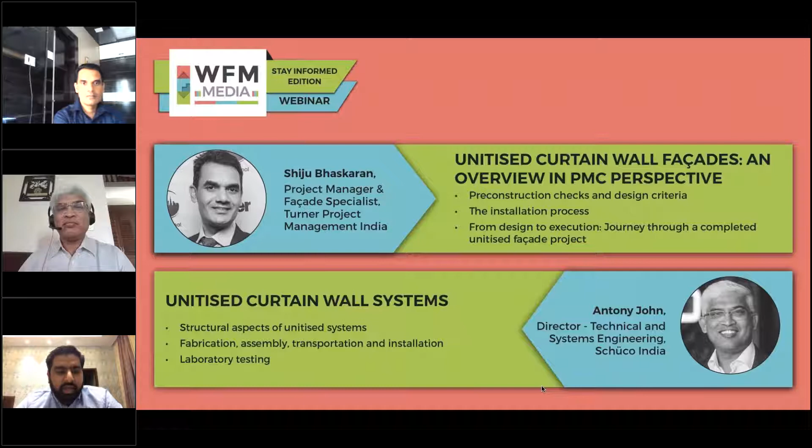To just give an overview of what's being discussed today, again, the topic is on unitized curtain wall. Shiju Bhaskaran will be giving an overview from a project management perspective, pre-construction checks, the installation process, design to execution with a case study. Antony John from Schüco India will be talking on unitized curtain wall systems, structural aspects, fabrication, assembly, transportation, logistics, and laboratory testing of unitized curtain walls.

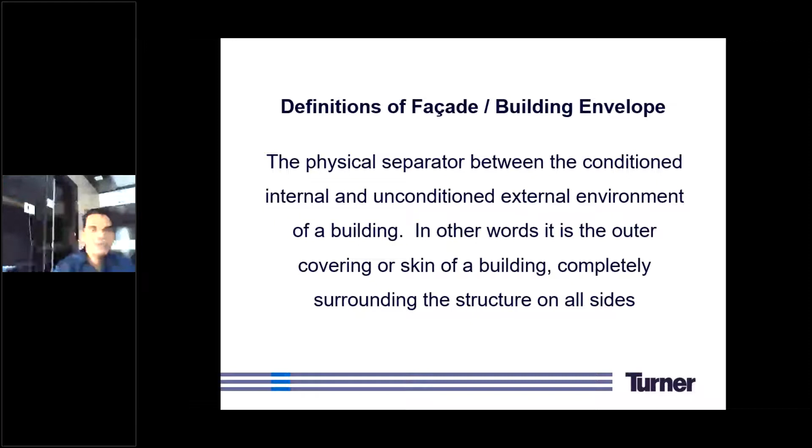parameters? So before talking about design parameters, the physical separation between the conditioned internal and unconditioned external environment of a building, that is the general definition of the facade. So a facade designer should consider all these parameters which you can see over here. These are the enemies of the facade, like air pressure, sound, daylight, snow, heat flow, humidity, fire, and contamination. So the designer should take care of all these.

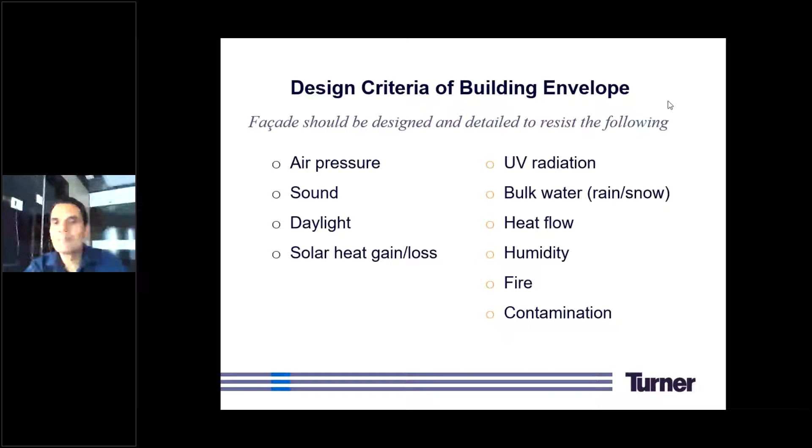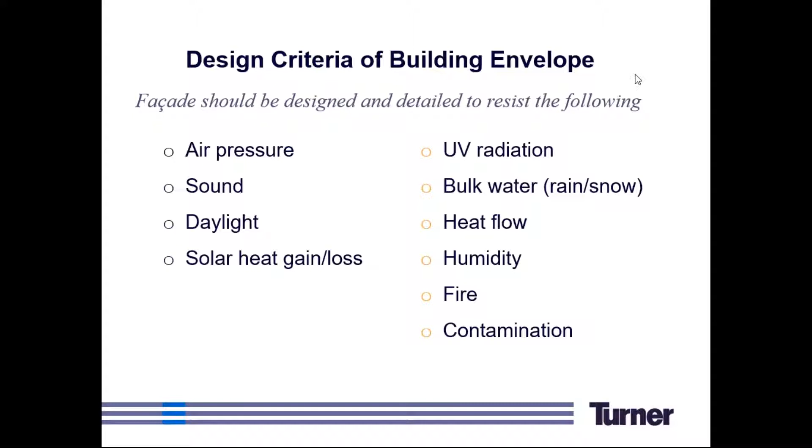Shiju, what I suggest is if you can switch off your camera, we'll get better bandwidth and a full screen, because we're having some issue with your audio. Just switch off your camera. You can press the button over there, the button is on the screen. Yeah, you mean switch off the camera? Yeah, just switch off the camera. Right. This is perfect. Thanks. Right, you can go ahead.

Okay, so the designer uses different... So the facade is designed for all the loads, as you know, the dead load, live load, the equipment load like facade cleaning equipment, gravity loads like people and snow, and the lateral loads like wind load, lateral seismic force, and thermal forces like expansion and contraction. So these are the major items which will come. Then comes the weather control layer.

1 minute, let me just close the door. 1 minute. My wife also registered for this webinar, and she is listening from the other room. So I'm a bit nervous.

You understand, right? So the primary purpose of the weather control layer is to manage the rain. So flashing, drip edges, weep holes, or any horizontal surface should have something like 2 degrees of slope. Those details should be considered in the weather control layer. Then comes the air control layer. The primary purpose is to control the airflow. There should not be any airflow into the building from outside. We use membrane, sealant, gaskets to control the air.

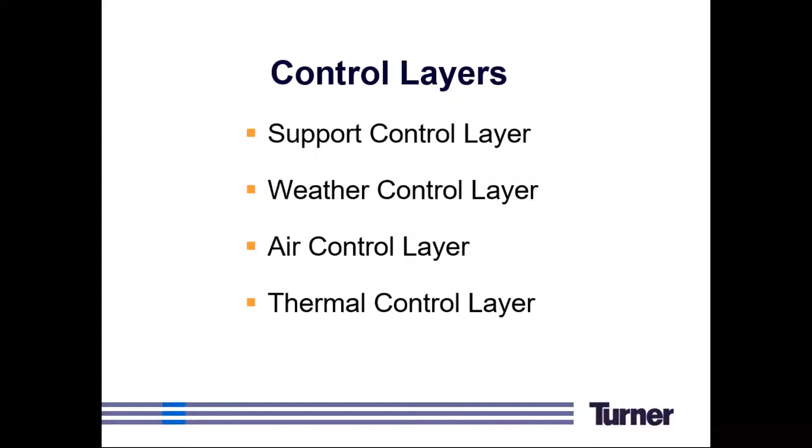So once the designer completes his design, the responsibility shifts to the site team. Site teams like us should realize the dream of the designer and the builder by ensuring the safety, quality, and cost parameters. Before starting the execution, we should do many pre-construction exercises. From a PMC perspective, I will talk about the major pre-construction studies which we conduct. One is the cost confirmation. We all know budget should be considered during the design stage itself. However, a serious budget comes only after we get the financial proposal from the vendors.

Then people will talk about value engineering. In one of my projects, the internal metal panel, aluminum, was changed to GA sheet. Something similar like that. So when you do value engineering options, make sure that the performance is not impacted. You can vary the specification without impacting much the performance of the overall facade.

Then the shop drawings. A detailed shop drawing should be prepared about the system, defining the grade, the extrusion material, and the specification of all these materials, including the powder coating, and at the end we should get approval from the consultant.

Visual and performance mockup is very important. A full scale mockup representing the actual product. When I say full scale, it can be 2-3 panels in the same 1:1 scale size, prepared for visual inspection and performance. The visual mockup can be done on site, and the performance mockup can be done either in the laboratory or sometimes in the plant if the vendor has the facility to do it. Tests to be passed are water penetration, strength, air infiltration, and seismic performance, and acoustic performance also can be tested.

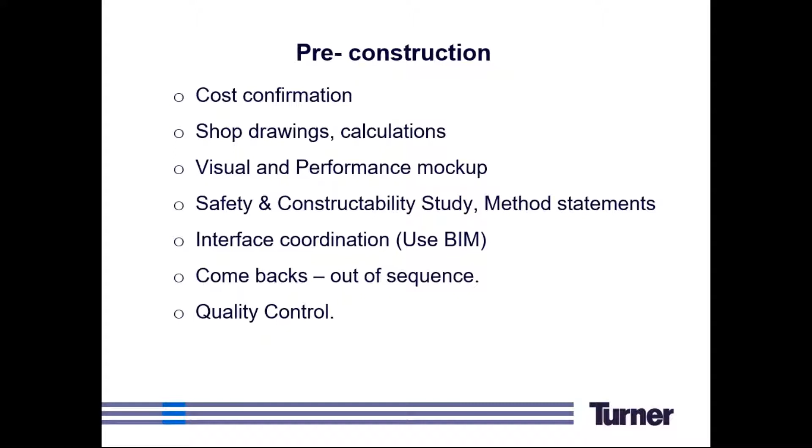Another thing is quality control. A quality checklist can be prepared. Many of the PMCs already have it. Many facade contractors also will have it. The quality control manual, what tests you will be doing after completion of the work during the closeout stage, and the inspection schedule, all those things can be discussed in quality control.

So now let me take you to the field. I hope that will be more interesting. This is the project which I mentioned previously. Here, this is a facade. I'm just showing one floor. Let me just show you how you define a unit, like a unitized panel. One of the panels is what you can see over here, another panel like that. So you divide this entire facade into different sections, different elements.

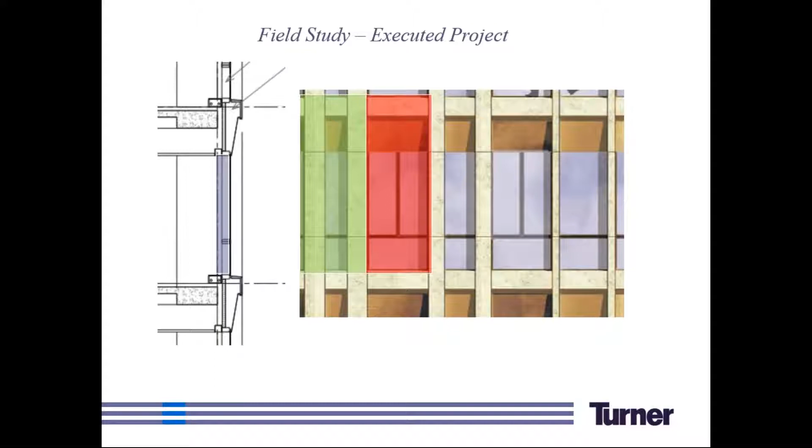So this is one unitized curtain wall element that will be fabricated in the factory, and then we come here and install it. So you can see here, if you can see the cursor here, this is a natural stone. With natural stone, the width is different in different panels. In that case, those all become unique panels. But it can be repeated. It will come like a modular panel, and it can be repeated in the upper levels.

So normally a unitized panel will have, you can see here, a spandrel on the top like this. So a spandrel with thermal insulation, and that can be used for fire separation also. If you have a nice stone wool kept on that spandrel, it will be helpful to stop fire spreading to the upper levels. So that's one option for this.

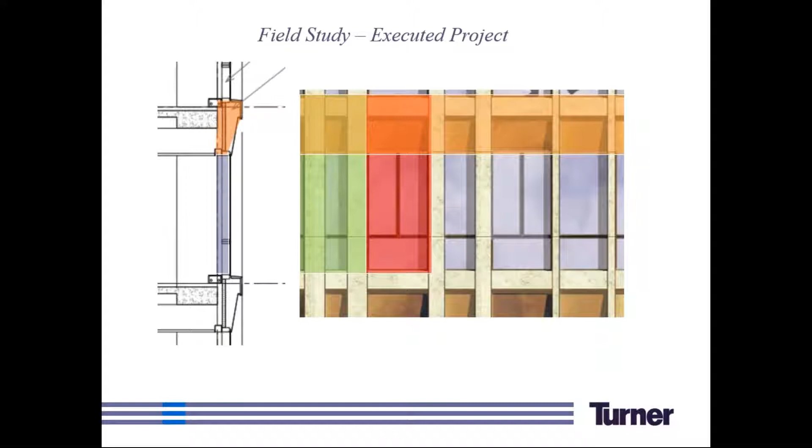And in most of the cases, in the front of the spandrel, you can see a stone element. In this particular project, we have aluminum. I'll go into detail in the coming slide. And secondly, we have the glazing. The glazing part can be a fixed glass or operable windows. I'll talk about the glass assembly in coming slides.

So this is an enlarged view of this spandrel part which I mentioned previously. Here you can see there is a stone cladding which will be fabricated in the factory with its back support, secondary support. Then you have an aluminum member here and its back support. Here we have used 3 mm aluminum with powder coating as specified in the drawings.

Then we have the stone wool inside, and you can see the connection between the facade and the slab edge. There is a gap. There we should use a flashing that will stop any kind of smoke spread into the next level. Smoke is more dangerous than fire, so that should be taken care of properly.

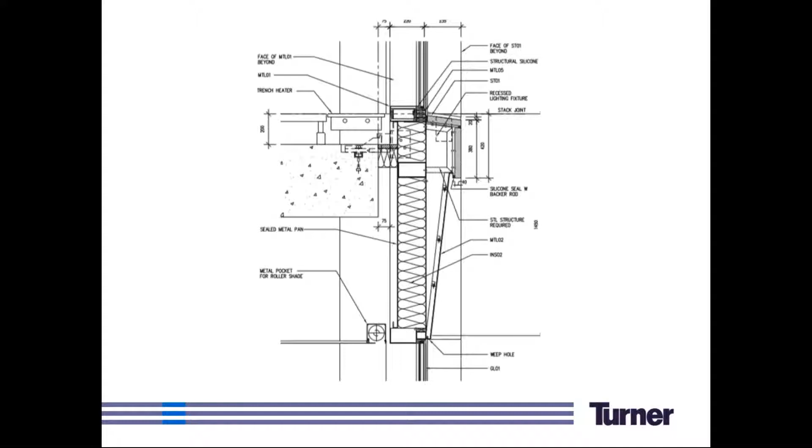Now let me take you to the next slide, a bit about the glass. This glass composition I have taken from one of our projects in the Far East, because the other project which I mentioned is in Astana, Kazakhstan. There the temperature difference between internal and external environment is very high. External temperature will go to minus 35 degrees. The Far East is more like India, almost the same kind of humidity and temperature considerations. So I have taken something from there.

So here you can see in the external element there are 2 glasses with a sandwiched PVB laminate. We have used 6 mm glass and another 6 mm glass. In between we have 1.5 to 2 mm PVB laminate. It's a clear laminate. If you need some different color, that's also possible. Then a 16 mm air gap, and inside 8 mm, again a high strength glass.

For the project in Astana which I mentioned, we needed better control, better insulation. So what we did there, we filled this air gap with argon gas. That will help a lot. And the internal glass element was 12 mm thick.

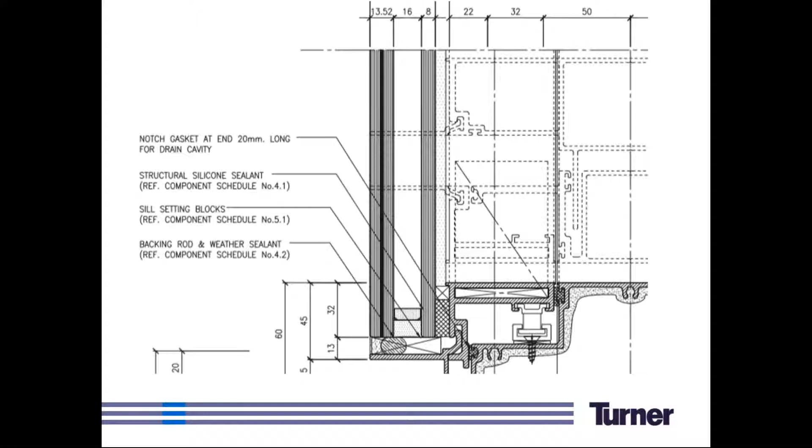Now let me take you to the field, about the installations. This is the first activity of a facade contractor. Here we have an interaction between a structural slab and the facade element. This is the first connection element. We will be installing this U channel. I don't want to use any trade names here. So that is the connecting element. All the load will be transferred from the facade to the structural slab edge using this U channel.

The U channel will be inserted into the reinforcement cage. There is a chance during the concrete pour and vibration that the U channel can move. That's a common problem we are seeing in the industry. So make sure you restrain it properly.

Nowadays these U channel suppliers are coming with some good options, like some end plate and welded mesh, and you can clamp this U channel to that. So that's an option. And you can see there is a T-bolt. That's another connection element which will come later. You can see there is a lock here. So this will be inserted into this U channel to connect the bracket. Normally this U channel will be almost 250 to 300 mm long, around 3 inches deep into the concrete.

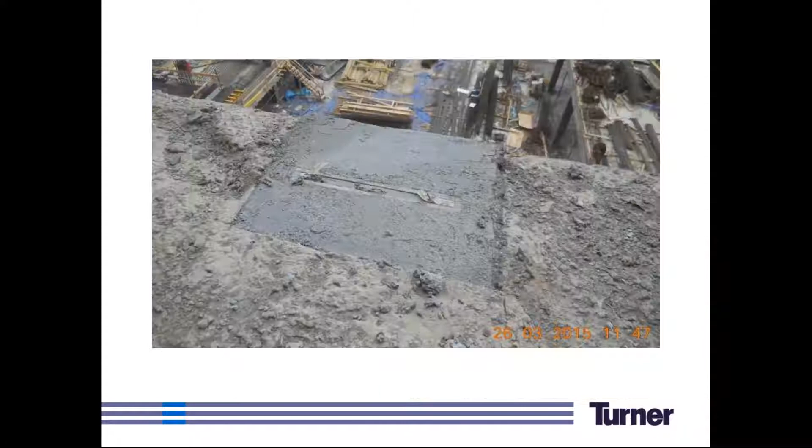Now here, this is the next activity. Once you install the U channel, it should be tested for its pull-out strength, shear strength, tensile strength, all those things. These vendors have equipment for doing that. You should do that after the concrete gets its strength. Anyway, you will get that strength because the facade activity will be done at a much later date.

Now the connection: you can see over here, this bracket is connected by using the T-bolt. Above the T-bolt, there should be a minimum of 1.5 to 2 pitch. Only then will it be strong. You should do the torque test for this. One important point I need to talk about, let me take you back to this T-bolt. On the top, you can see a notch. This shows the direction of the T-bolt.

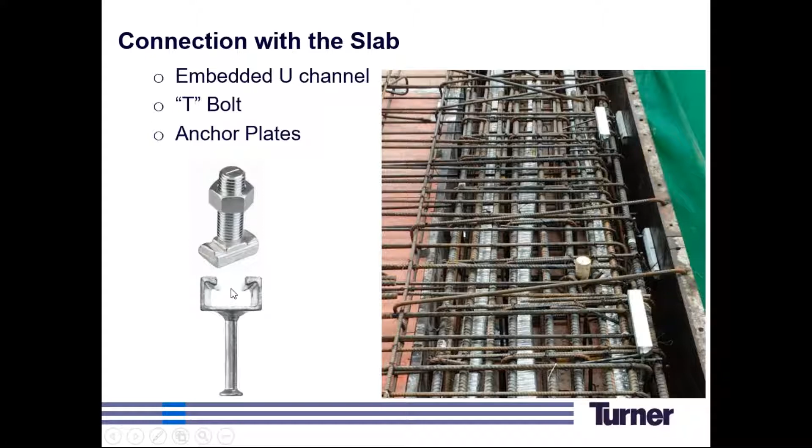Once you insert this T-bolt into this channel, it should be perpendicular to the longitudinal direction of the channel. Only then will it be locked; otherwise, it won't be. Once you install the bracket, you won't see the connection between the T-bolt and the U channel. That's why it is important to know the direction. On the top of this bolt, this notch will show the direction. In case you think it is not perpendicular to the longitudinal direction of this U channel, you should open the assembly and do it again.

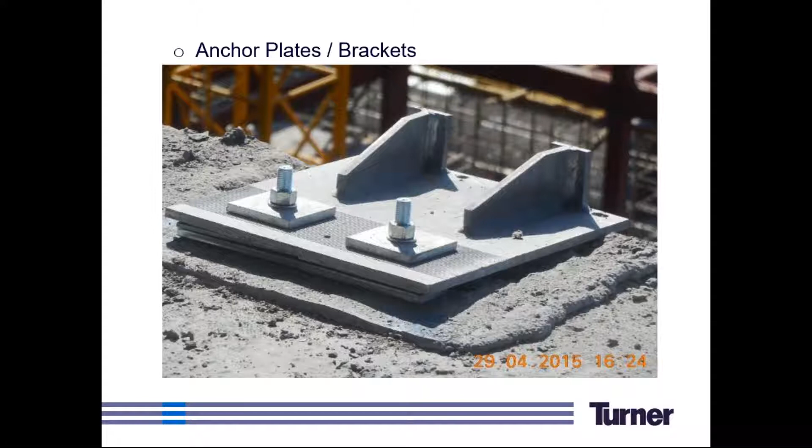Now about the fabrication, I won't be talking much about it because most of the system components are assembled in a plant or factory under controlled working conditions. Quality will be improved, schedule can be predicted, and rapid closure of the building without being affected by weather conditions is possible. So this is a very good system. That is the main beauty of this unitized panel.

The stick system is something like cast in situ concrete: you do everything on the site. A unitized panel you can consider like a prefabricated or precast element. But as a PMC, material release, fabrication and assembly, the time taken, conveyance, how you bring it to the site, where you will store it, all those items need to be studied well in advance.

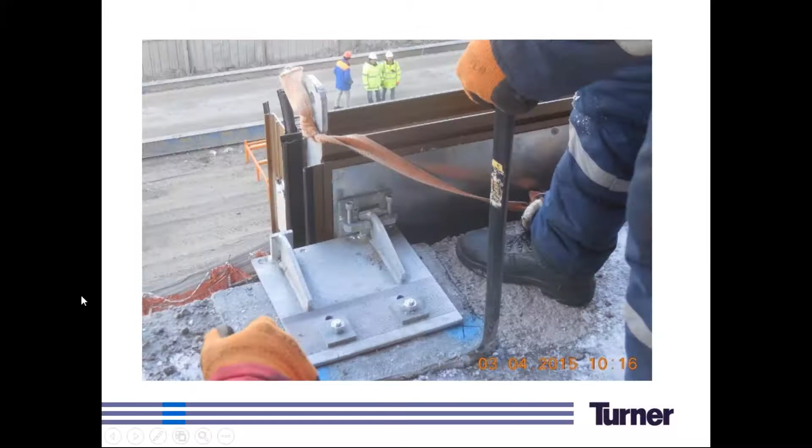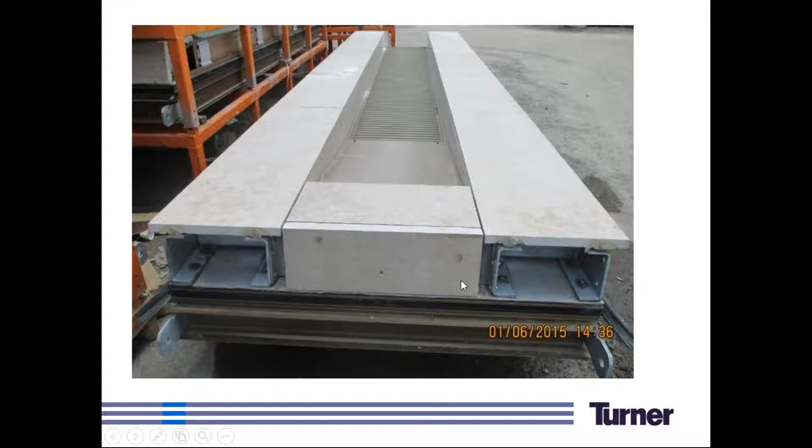So now let me take you to the installation. You can see here this panel is lifted using the crane, or you can use a winch also. In some cases a monorail can be fixed, or we can use BMUs. But normally BMUs come in at a very later date, so you should use the crane or winch.

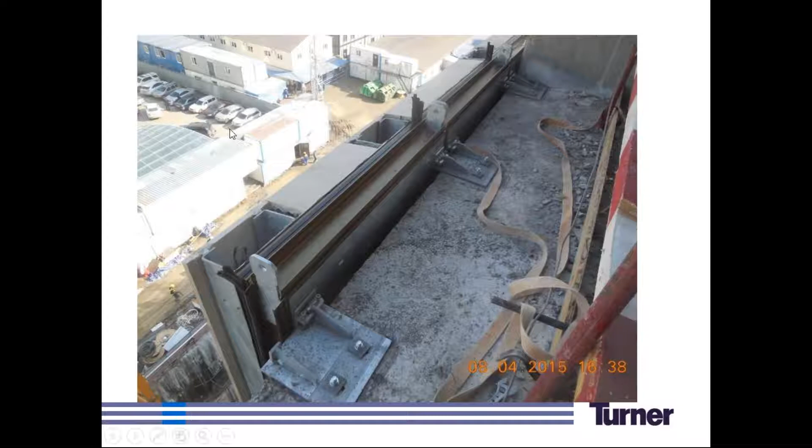So here the facade element is connected to our bracket properly, and only one panel is connected here to the bracket, and the other side another panel will also come so it locks properly. This photo shows the exact connection between the two panels, and the gaskets are all visible here. These are the lifting hooks, and you can see this gap, like I mentioned previously in the sketch of the span rail.

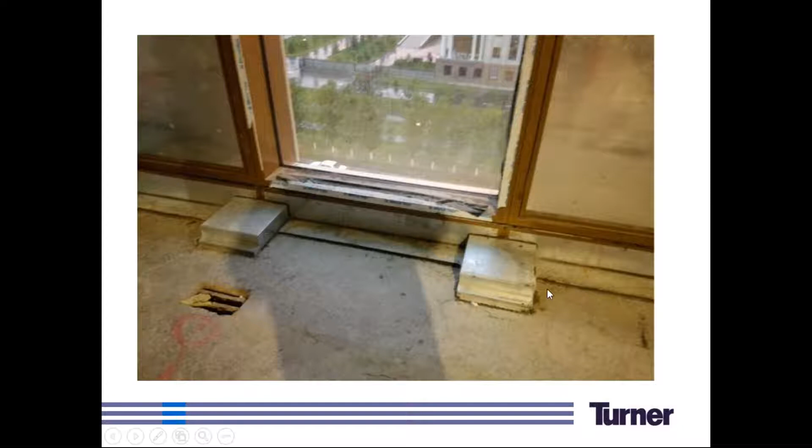Later you need to seal it using some flashing here. So now, this is a photo from inside. All this bracket assembly is covered so that debris will not get in, and this is the flashing. This should be sealed properly, there should not be any gap into it.

Now this is a facade protection for the glass. Normally the facade activity will follow the structural slab activity, so facade work will be starting even while the structural slab pouring is going on at the top. There are a lot of interior works which will follow, like MEP activities and interior partitions, and during that time there is a chance this glass can get damaged.

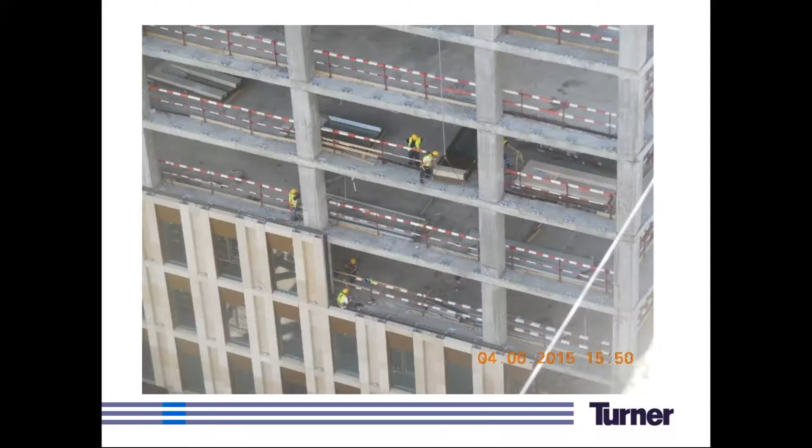Minor damage can be prevented by using this spray application. It forms a kind of membrane that you can peel out during the finishing stage, giving some protection to the glass, especially when we deal with different package contractors. Every package will think only about themselves, they won't think about others, so in that case it's very critical to protect the facade work by the facade contractor.

So here, this is showing the progress. The installation is not very labor-intensive work. You can see here one crew, one team bringing two guys on top, they take the panel down, and there is another person standing on the floor below at the installation bracket area, and another person on the lower floor. So it's like around 6 or 8 members maximum, and they can install these panels. It's very easy to install.

Now I am coming to the final slides, only a couple of slides left. Let's see, these are some points you should remember, from our experience.

You should coordinate with crane bracing in advance. You can see the crane bracing for a unitized facade. It is always good to take the crane bracing through the glass element, since glass can be installed at a later date. If it goes through the mullion, it will be a problem, unless you have some other jugaad in India, which I don't know. But normally this is done like this.

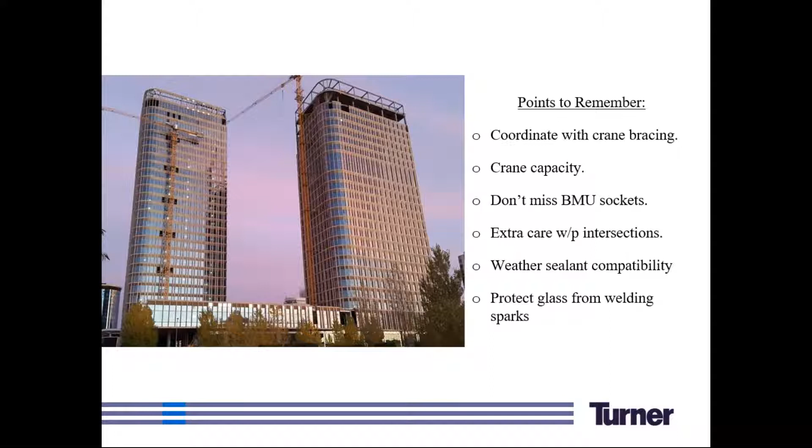That protection also should be taken. So this is the last slide. In closing out, you should do the necessary testing and arrange all the product warranties. Most products in a system are warranted, typically 10 years, so make sure you get it. Keep an attic stock, especially for major elements like stones, since later you won't be able to source it. Try to keep sufficient attic stock, compiled as-built information. So that's it, I hope you enjoyed this presentation.

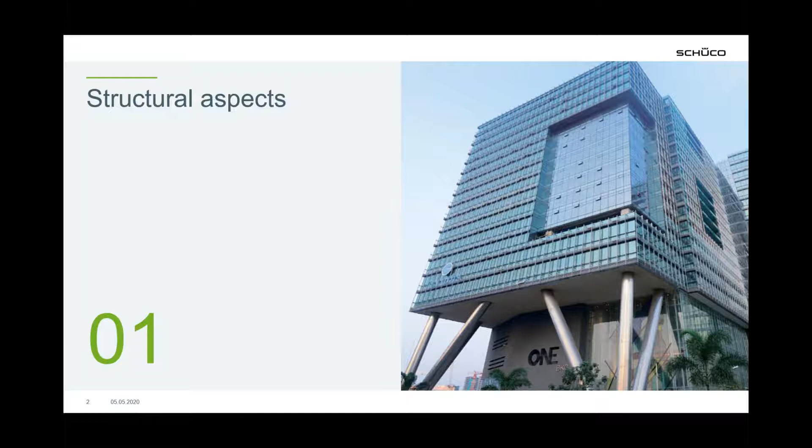What we are going to be talking about are three aspects. One is the structural aspects, then the fabrication, assembly, logistics, installation, and the last one is going to be the testing part of it. To understand any project, before you start deciding on what you're going to do, assuming that we've crossed the stage of tendering and gone through all these negotiations...

Then we start with the actual designing and constructing the facade that is suitable for the particular project. First and foremost, what you need to do is understand your specifications. So I would like to put it up in a simple format that condenses the most important critical items that need to be considered from a structural perspective, related to the tender specifications.

One of them is your wind load. What is the applicable wind load for your project? This is defined by the facade consultant, and there are different criteria - either you calculate it using Indian standard IS 875 part 3, or use a wind tunnel test report, depending on where your building is located and what shape it is. For this particular project, the specification was a wind load of 1.8 kPa.

The second aspect is understanding what modules are coming into the project. The most typical project module - we had a few different modules, but the most common one was 1.5 meters center to center. Each unit, which Shiju showed earlier, we had two different units in the previous project. Here, most of the units were 1.5 meters center to center, with a floor-to-floor height of 4.2 meters.

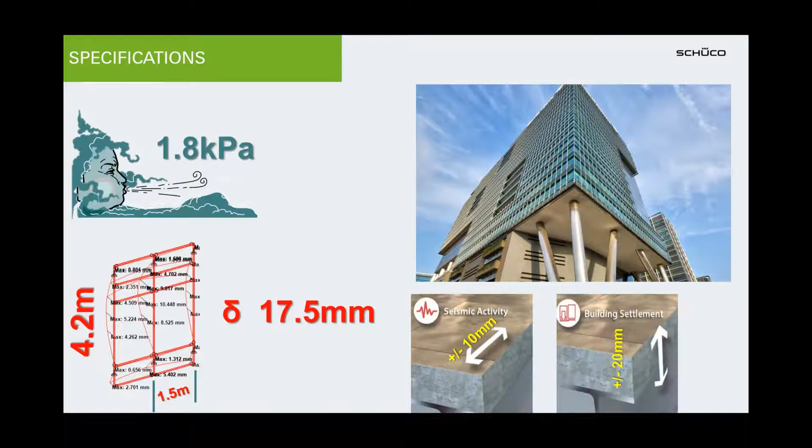The second thing you need to take into consideration is what kind of movements you're going to have - if there's seismic movement or any activity happening, what kind of movements are anticipated. The specifications mention plus minus 10 millimeters allowed in both directions. The other part is building settlement, movement due to thermal expansion, long-term creep, column shortening - all put together, the vertical movement was accommodated through the system, which is the stack joint.

You're expected to accommodate a building movement of plus minus 20 millimeters. This is pretty big. So when you do plus minus 20 millimeters, the stack joint gasket needs to have proper support. Otherwise, it will fall over and you will not be able to achieve the proper requirement.

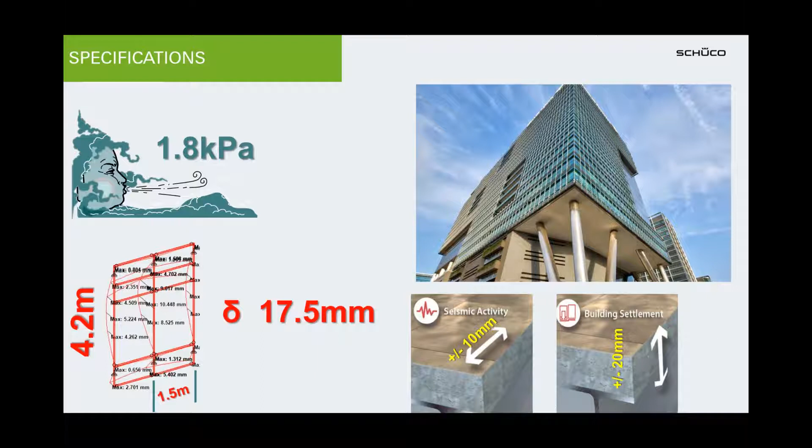Last but not least is your air and water. What kind of air tightness? Now, Shiju had mentioned about the control layers, and one of the control layers was air control. What is the amount of air coming in from outside to inside? And why is that important?

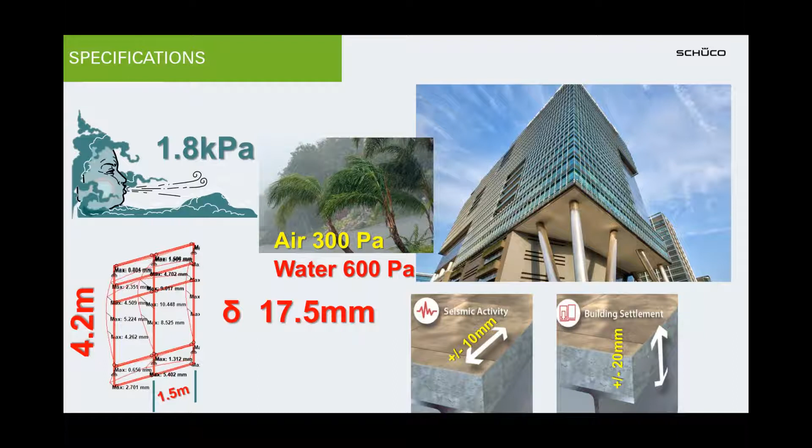Because you have a lot of heat in our climatic conditions coming in from outside to inside, like in the Mumbai region. During summer, you get 35, 37 degrees centigrade, probably even more, and you want to keep the cooling load by the HVAC units lower. You want natural ventilation coming in, but at the same time, limited ventilation. So the air penetration allowed was for a pressure differential of 300 Pascal and 600 Pascals for water, because we have a lot of monsoon in our region in Mumbai.

Now, what are the other criteria contributing to the design of your mullion and transom? You have some external elements, which are louvers in this case. The louvers are about 256 millimeters away from the face of your glass, and overall about 400 mm away. This means when there is an uplift coming from the wind load, there is going to be a moment created, and an additional load that gets transferred over to the member.

So it is not enough to design only for the wind load, but also to take care of these additional loads coming onto your member. You need to first identify what loads are going to come in and how you're going to transfer the load back onto the structural slab level. Last but not least, you also have to check with the structural engineer on site if the slab is designed to take care of those loads. 99% they would have taken care of it, there would be a safety factor, but it is always prudent to do due diligence ensuring that the slab is capable of taking the loads as well.

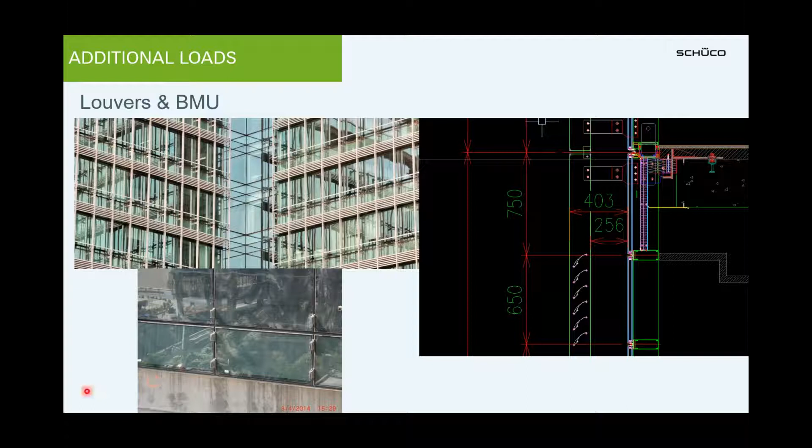One aspect is that you may have designed a wonderful facade, you may have designed your mullions and transoms, but if they are anchored back onto the floor slab and that is not taken care of properly, if it is not designed properly, then the whole facade design is going to be a waste. You will never get a flat facade. You may also have structural issues, failure on the facade, and serious human and life safety issues coming up.

Now, while designing the facade, you need to take into consideration the different issues you have. Do you have an anchor bracket location coming in near a column? Do you have a shear wall? You need to define or design an anchor bracket which is floor mounted or face mounted. What kind of access, how are you going to do it? Is it a wind load, or is it going to be a double bracket system or a single bracket system? So those kinds of things have to be taken into consideration.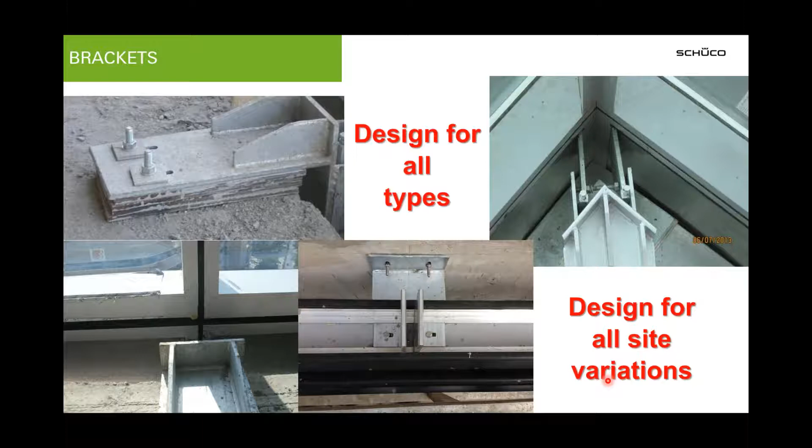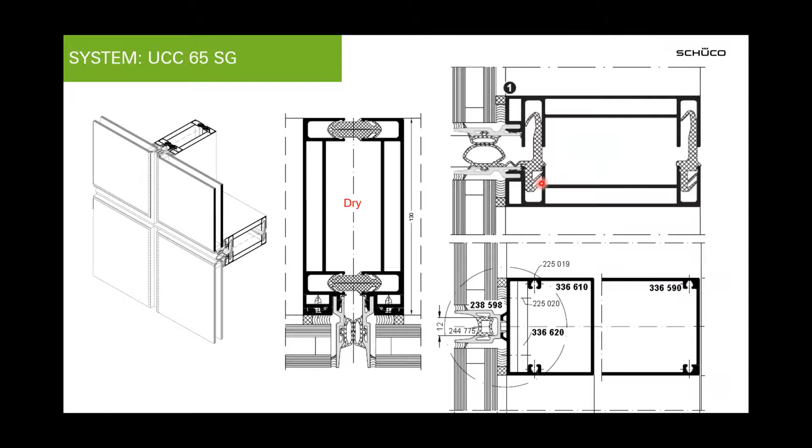The general principle, what we have is an overlapping principle. So the verticals, which is what we have here, overlaps across the horizontal. The horizontal we call as a saddle gasket, and this is the coupling gasket. So you have an overlap coming on top of here, and similarly you have an overlap here, which means any water that comes to the front comes over here, and through a drainage notch in here, it comes outside. So that's the basic principle that we have, and that is why we're able to reach very high test pressures. This particular system has even passed 1,400 pascals on water.

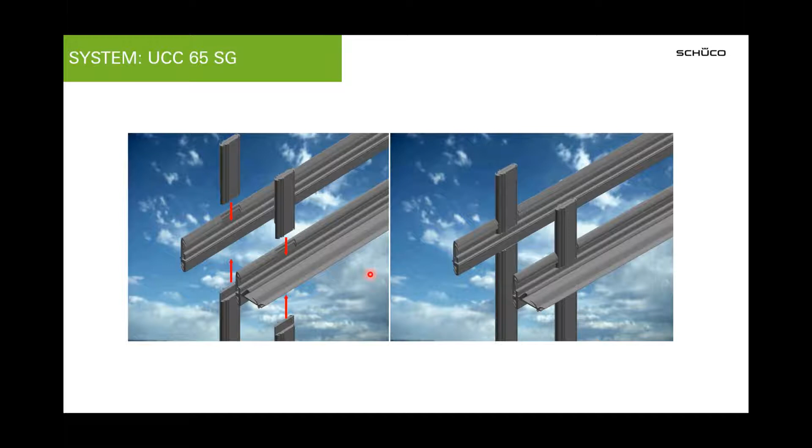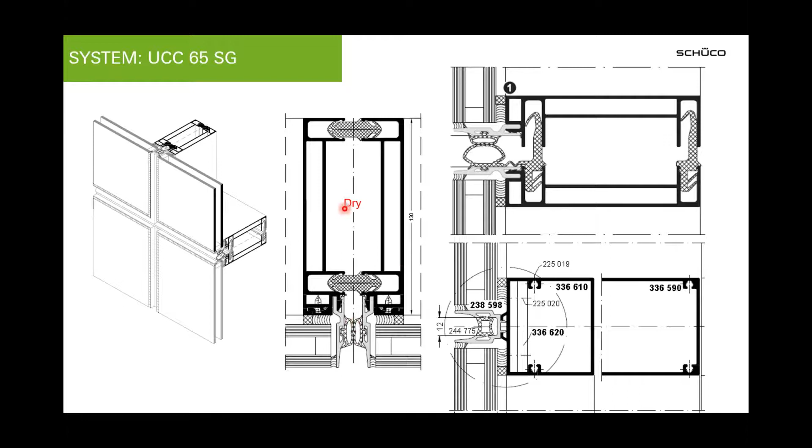So you see the same gaskets that are being used in the, so just go back. So these are the gaskets. So you can just correlate these gaskets that you see in the test element here. So these are the gaskets that we are talking about. The rain screen gasket, the front coupling gasket, and the back coupling gasket.

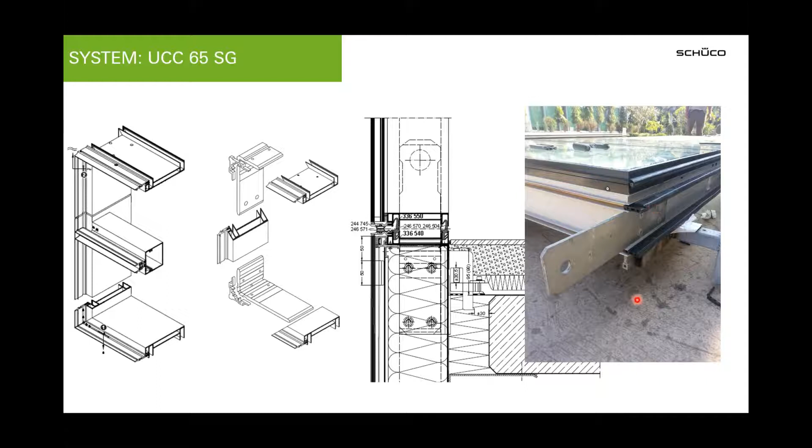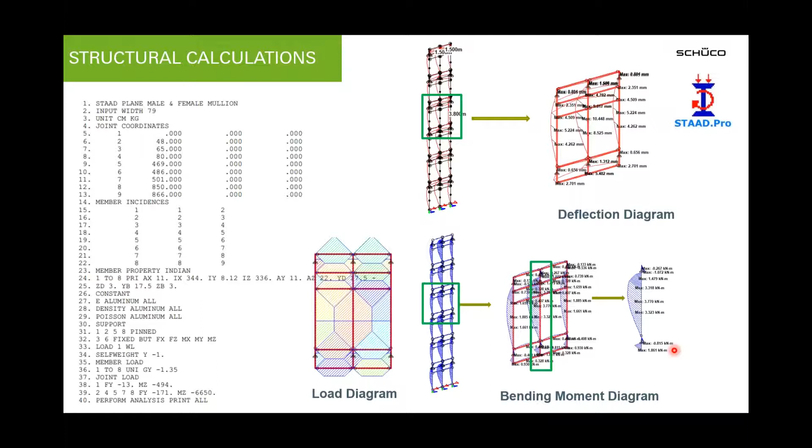So depending upon that, we then decide, okay, for this particular Ix value, this is the deflection that we're going to get and how it needs to be done. So from your bending moment diagram, we then calculate what are the stress capacities and is it still fulfilling or not. We also ensure that the combined stress satisfies the unity criteria as well.

So once the basic mullion transom design has been made, we also verify for the bolt. The bolt meaning it's not only the anchor brackets or the anchors, but also in this particular case, we have the louvre bracket that projects out. So you need to ensure that the loads are being taken care of, and the bolts that are connecting the louvers and the louvre mechanisms where the louvers are being fixed are not getting sheared off, because the bracket might be good enough, but if the bolts are not good enough and the loads are very high on your louvers, then the bolts could get sheared off. So we ensure that those calculations are also taken care of.

This fin support is done. The load transfer of the fin to the mullion back structure, which I already explained earlier. Then the BMU loads for the restraining pins, that also needs to be ensured, and it must not bend your fin bracket and damage your glass. So you need to ensure that load is also getting transferred back onto the substructure. So how often are your BMU restraining pins required? Where all are they required? And those restraining pins also need to be tested.

Last but not the least, thermal calculations. So we also did a simulation of the thermal calculations because there was a verification required for the HVAC requirements. So for every section detail, thermal simulation was done, and thermal calculations on what is the U value that is passing through the element are also provided. Similar thermal calculations for the entire element can also be done, and it was done even for the REC project, to prove that the proposed design will meet the project conditions.

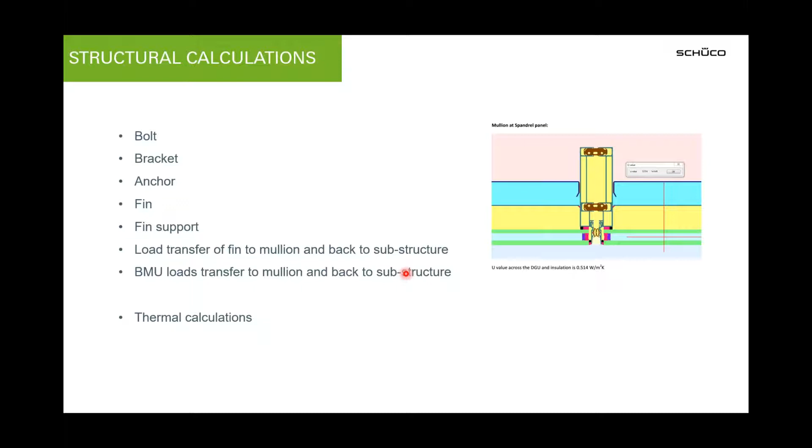And in REC, we also did a thermal testing at Winwall, and the end result of it also proved that what has been proposed meets the project requirements. So that is possible to be done. We can do thermal testing in India at the moment. And the Bureau of Energy Efficiency is also coming up with requirements in order to ensure that we have certain U frame values, and people are well informed and able to choose appropriately and design. So that is coming up in the near future as well. So that's on the basic design part of it.

Now, one aspect of the design I have not touched upon is the shop drawings. With the limited time that I have, I'm not getting into it. We all know the shop drawings are very important, and that approval of shop drawings is very important. And unless you get the shop drawings approved, you should not start on fabrication. You can order the material based upon your system approval, but you should not start your fabrication unless you get the shop drawings and your site survey done. Even to a certain extent for the unitized panels, since the floor slabs are predetermined, your unit size is also predetermined. All the typical units can start production, but if your shop drawings are not approved, then I wouldn't recommend proceeding on that.

What is very important are, as I mentioned, approved shop drawings. Now, tag drawings. What are these tag drawings? You have to take each of your elevations, make a developed elevation for each of it, and then give an ID number for each of the panels that is coming in. And then you can combine and say, okay, this ID number panel can be used. I need about 200 of them, 400 of them, 1,000 of them, whatever may be the case. So in case of damage during transportation or lifting or nickel sulfide or whatever may be the case, your project is not getting held. You can swap it with any other panel with the same ID number. So that is also possible.

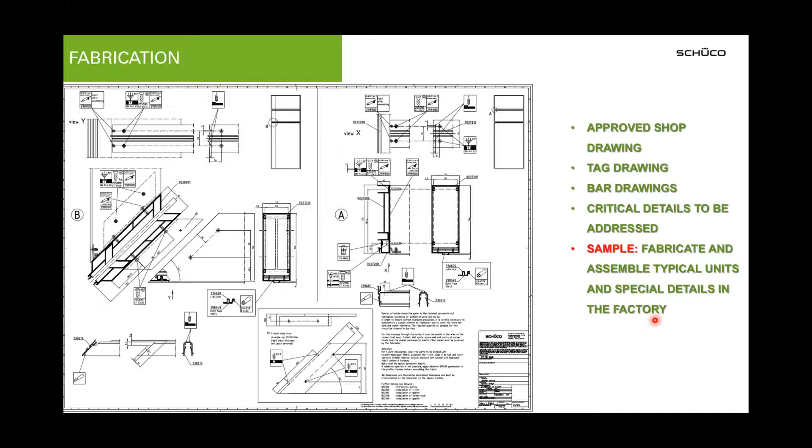This is just zooming in and showing to what extent you need to make details. This is the notching, this is the dimension. So those kinds of detailed dimension drawings have to be provided. And further production drawings, in much more detail for each individual element, also have to be done. So the fabrication assembly, shop drawings, fabrication drawings, tag drawings, all that has been done. Now comes the real work, right?

So the real work, let's assume there's a minimum level of equipment that is required, and that is already available in the factories. You have a CNC machine, you have the quality process. You're not depending upon quality control, but rather on quality assurance, which is the process laid in place that after every element is produced in accordance with your production drawing, which is your bar drawing, there is a quality inspector who checks it and tags it off and says, yeah, it's QC inspected, good to go, and it can move on to assembly.

So when he's assembling, when he's got all the relevant parts together, he knows what part is what, where it goes, what the component is, and how to assemble it. So he's got an assembly drawing, and he knows the part ID numbers also, and he's able to put it together. So what we see here is a typical sample board in the factory.

This is not the one that you submit to the client. This is more for the people in the factory to have a quick look at it and say, okay, this is how it goes, this is how it's going to look like. This is my shop drawing, and this is what it is. If I need a measurement, this is what it is going to be.

And this is the miter joint. We said our units are corner cleated mitered. So this is what we call a miter set, which helps it to clamp in position while the corner glue, a 2-part epoxy, is being injected, which is what you see in that yellow color stuff. It's a very cementitious material and becomes really hard. And while that is gluing, we're able to hold it in place in order to assemble it. We also have a nailing possibility, a screw possibility, and a crimping possibility.

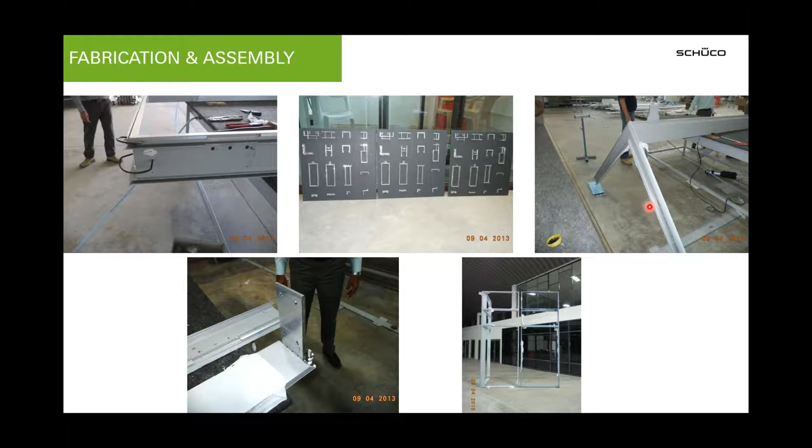This particular item was a corner assembly. So the corner unit was being assembled to see how it all goes in. What is the miter? What is the angle? Whether you can cut the same angle. Sometimes the mullions are so deep that it will be very difficult to cut it. So all the problems and issues that you're going to be facing can be resolved by doing this sample assembly. That's what you see in these photographs over here.

Now on site, again, the first sample panel that is coming is also being taken on site. It has been transferred in dollies, and you have different methodologies of transportation. Either you can transport it vertically, or horizontally on your trailers. For example, in the project that I did in New York City on Madison Avenue, you don't have the option of stocking in a storage facility on site. So you need to lift it and install it straight away. So you have a limited number of locations where you're able to lift and install it.

Whereas in another site, there's absolutely no chance for you to do this, and so you need to store it on the relevant floors, the floor above, and then have it installed. In this case, we have the panels being stored down below and then lifted above and installed from the floor down below. So there was a mix being done. Not all of them were lifted from below. Some were also stored on the floor above and then dropped down as well. So depending upon the site location, the availability of the crane, and so on, it was being done.

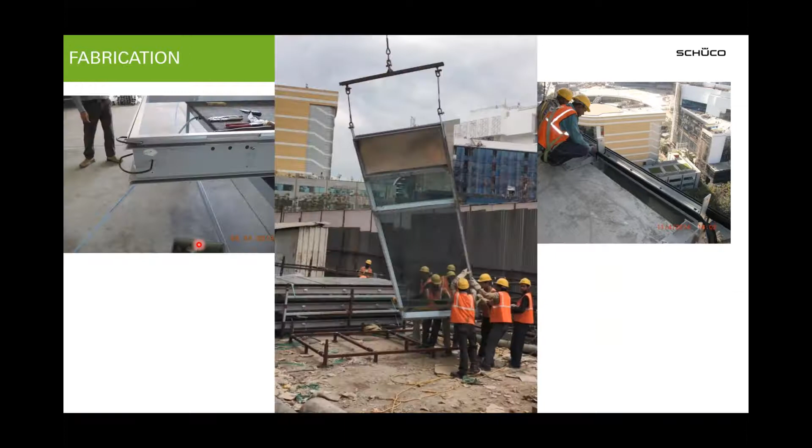This is where the panel was lifted from a floor above and then installed, like in this particular condition. In the first figure, the previous one, it was taken from the floor below. So there are two kinds of scenarios that are possible and can be done.

As Shiju mentioned, for the project in New York, we transported through the hoist. The unitized panels were transported through the hoist and not lifted through the crane, because that was a refurbishment project. Now, during installation, there are a few quality measures you need to see.

The design specifies the depth and face width of your panel. So when assembling, you can easily cross-check simple measures like face width and stack joint height, and see whether you've achieved your design parameters, whether it is plumb. These are all done without laser levels, just using standard stuff, but it's still possible and you're able to align it.

One beautiful thing about this system is because of the sword plate, alignment is a lot easier, because the panel can go only between the sword plates. So it's a lot easier to align this panel. The only issue is whether it is in or out, which can be taken care of using a simple plumb line.

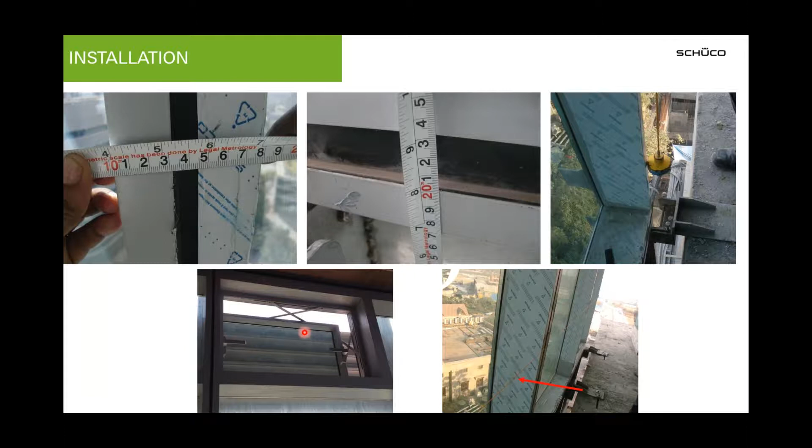We also use a line, which we call in Hindi as 'Dori', to ensure all these panels are aligned as well. We can easily measure if the floor slab is flat, your panels have to be aligned, they have to be in line. So those things have been done. On the left hand side, you see the parallel pop-up window that comes pre-installed into the unitized element itself.

Right, now let's move on to the testing aspects of it. There is a specification that has been given, so we have two kinds of testing that needs to be done. One is the laboratory testing, and the second one is the on-site testing.

This is the laboratory testing that was done for this particular project. Fabrication has been made - you can see these panels, and these hooks also, for the facade brackets, the same thing over here. You've seen that in the actual project condition, this is the corner condition. What you've seen is the typical one on the project on the starter panel, so the same starter panel kind of conditions as well here.

This is used right at the top because we have a coping and a closure. So we lift using this particular panel - this is used also as a lifting lug. Normally what we also do is use a spreader bar.

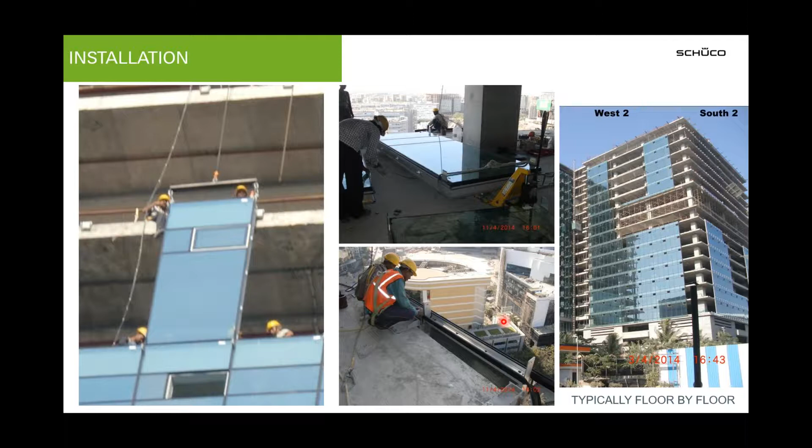This is very, very important, so let me just show you. If you see here, there is a spreader bar that is being used in order to lift the panel. This is to avoid the panels from collapsing or damaging, so that it will help you to align your panels above easier. So the spreader bar is quite important for you when you're installing as well.

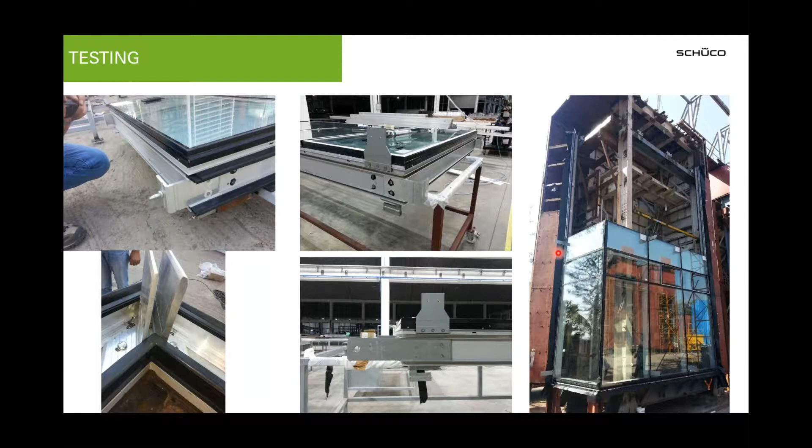And actually I had a video, I couldn't find it. This panel - you didn't have to really work hard on it. It was just sliding smoothly because we have a special wax which we use on the sides, and using which this slides down very smoothly and comes down. You only need the last, I would say, just a little press on it and it kind of goes down. It's very easy to install these panels.

The criteria, as we said earlier, was air infiltration 300 pascals, static 600, dynamic water using the aero engine was 600 pascals. Design load was plus minus 1800 - I think the number is missing. Seismic was plus minus 10 mm.

Then after seismic, we also did a repeat air and repeat water, because even after seismic activity and earthquake, the panel performance should not get compromised. We want to ensure the same performance is there. No glass should break, no gasket should come out - all those things also have to be there.

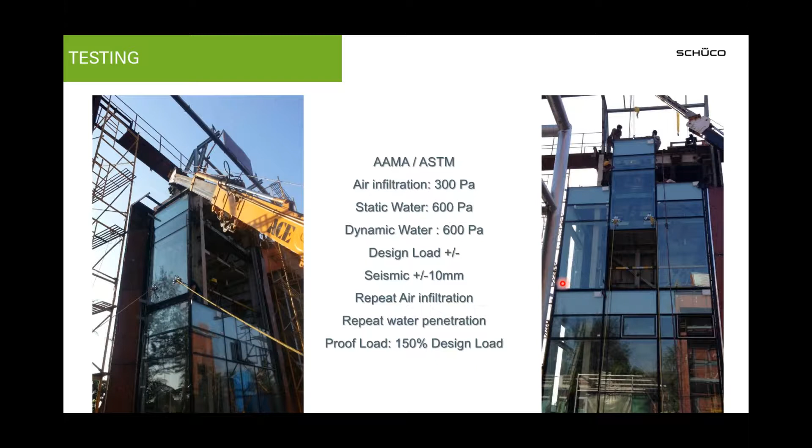And subsequently, we also have a proof load criteria, which is 150% of design load. So when you do 150% design load, again, there should be no glass breakage. There should not be any permanent deformation above a certain limit as well. So those criteria are also taken into consideration in order to determine whether it is a pass or fail.

So when we did the testing, the allowable air infiltration was 56 cubic meter. We achieved a very, very low value - I think it was about 6.3 cubic meter per hour. That was that airtight, using just gasket, no sealants - it is only gaskets. Water tightness, because it was pretty tight, there's no water leakage happening.

Deflection allowable was 17.5 mm. Again, it was way below what we were able to achieve, because normally when we do the calculations, we don't take the strength of glass into consideration. That is ignored, and it is not generally allowed. So we were able to achieve it very easily as well.

2.7 kilopascal was your proof load. The proof load is 1.5 times 1.8 kPa. Again, no breakage. Deformation was also well within the limit - there was hardly any deformation that was noticed.